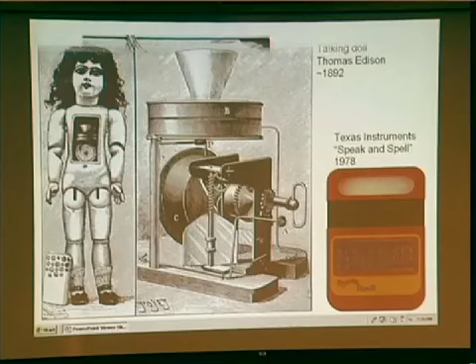Parenthetically, let me say that in the Ozma of Oz, which was a sequel to The Wizard of Oz, Dorothy comes across the mechanical man. You wind him up and he can walk or talk. But rather like ex-President Ford, he can't do both at the same time.

Now, another example of what would be surprising in its day is articulated arms. Humans have articulated arms, and here's the first statue that actually had articulated arms. Of course, they only had 1 degree of freedom. And by comparison, the human arm, counting all the fingers and all the joints and so forth, has about 27 or 28 degrees of freedom. Still, 1 is a start.

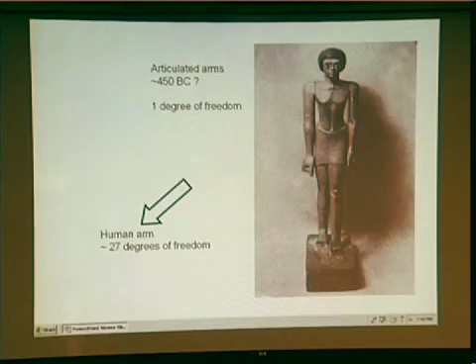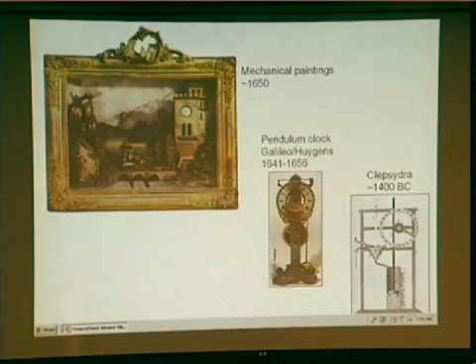Around the same time, mechanical paintings became very popular. Now, in some sense, I wouldn't consider this to be a robot because it doesn't perform any animate function. On the other hand, you have to imagine the balloon drifting back and forth, the windmill turning, the train moving, the boat moving, and of course, the clock moving. And a clock moving is, of course, a sequel to the first pendulum clocks, which were, the concept came from Galileo, but was perfected by Christian Huygens. And that, in turn, was the automated version of the clepsydra, which goes way back in history. I don't consider any of these to be robots.

And then for 200 years, this technology was lost until an inventor came along in Switzerland very recently by the name of Francois Junod, and he has built this machine.

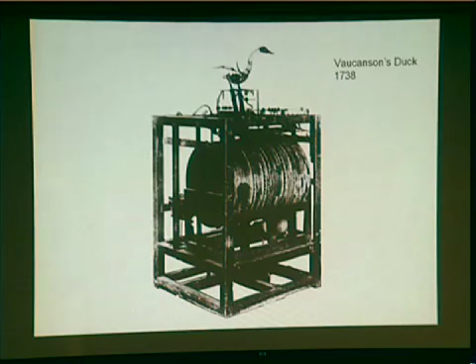The operator would realize the duck was hungry, so he'd take a dish of food and put it right in front of the duck. Almost immediately, the duck would start eating the food, and as it swallowed, you could see the peristaltic motion of the neck muscles. Then it would stop periodically, quack, look around, flap its wings. When it finished, it had eaten very quickly—you could see from the pained look on its face that it had eaten too fast. It had a stomachache, looking more and more uncomfortable, and suddenly with a little grunt, it relieves itself on the table. A chemical smell spreads out through the room. Wild applause for Vaucanson's duck.

Now, how did it work? Well, of course, there was a small chess master hiding inside it. Many people speculated on the construction.

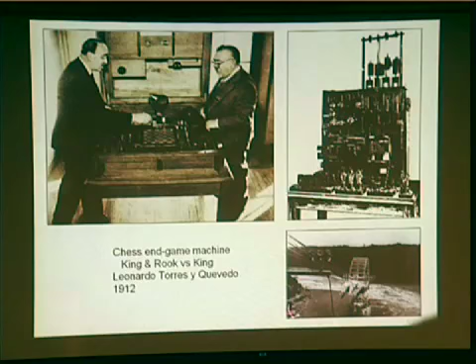Now, the first actual chess-playing robot was built in 1912. An electromechanical machine was built by Leonardo Torres y Quevedo, shown here being demonstrated to, I think that's either von Neumann or, what's the other guy's name, Norbert Wiener. I don't know which that is. All it could do was play a king and a rook against a king. But remember, no computer involved, purely mechanical system. By the way, Quevedo also was responsible for building a cable car that runs above Niagara Falls so tourists could go there.

Now, the next major topic of this talk is to get into the work of the artificial intelligence labs around the world. There are 4 subtopics: intelligence, mobility, visual recognition, and dexterity.

The people who coined the phrase artificial intelligence, or AI, were John McCarthy at MIT and later Stanford, and Marvin Minsky at MIT. They predicted that within 10 years, computer programming would get so good it would be world champion. Well, a pretty good chess player by the name of David Levy didn't believe this, so he offered to bet £1,000 that the machine wouldn't even be able to beat him in 10 years. And 10 years later, he won that match.

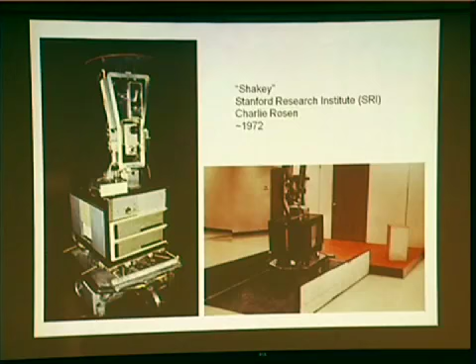At the same time, there was a project at SRI, headed by Charlie Rosen and Nils Nilsson, called Shakey the Robot, so-called because it would roll to a new location and then it would kind of shake back and forth until it damped out. Also battery-powered television camera, but here it's given a task in robot planning. The task is to knock the block on the floor, and it figures that in order to do that, it has to find the ramp, move the ramp into position, then roll up the ramp, and then knock the block on the floor. So what it's doing is planning, and that's surprisingly animate.

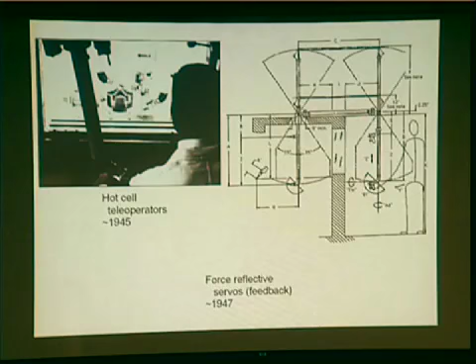One of the problems with this is that there was no force reflection, so he couldn't tell how hard he was grasping. So if you're holding a test tube, if you grasp too hard, you crush it, and if you don't grasp hard enough, you drop it. So within a few years, it was necessary to add force reflective servos.

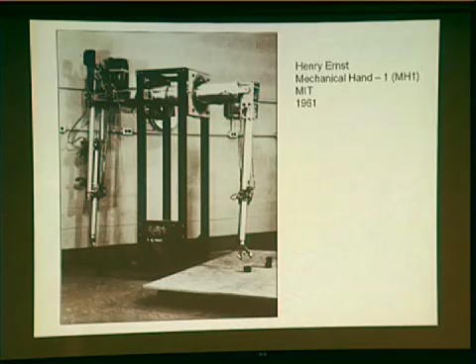Henry Ernst took one of these machines and replaced the operator with some motors attached to a computer in 1961 as a PhD thesis. He also added sensors in the robot hand and programmed it to grope around a table, feeling for blocks, and then either stacking them up or dropping them in a large box. He was, by the way, then hired by IBM with the stipulation that he would never for the rest of his life work on robots again.

13 years later, MIT had progressed to this level, the so-called copy demo, in which an operator has built a building out of blocks. The camera looks at it, figures out how to build it, and then it builds a copy of it. Or, if you wish, a mirror image copy of it, whichever you prefer.

Around the same time, Stanford was working in the area, and this is the so-called Stanford arm, built by Vic Scheinman in 1972. Let me mention that Vic Scheinman is here today. Where is he? He's hiding. So there he is, over there. At the end, when you start asking me questions, you can split up and ask him some questions.

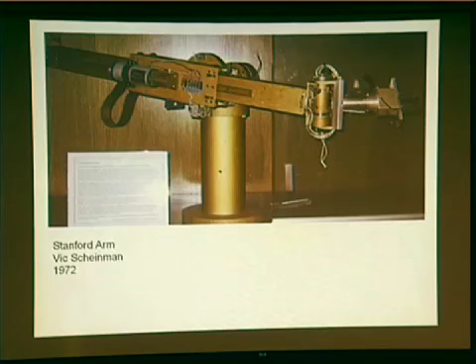After this arm was built and attached to a large computer, Lou Paul programmed it to solve the instant insanity puzzle. The puzzle is to stack these blocks up so that each column has all four different colors. The television camera can only see 2 or 3 faces at a time, so it takes about 5 minutes for the robot to turn blocks over in different orientations until the camera sees all the faces. Then it takes about 1 millisecond to solve the puzzle, and another 5 minutes to stack it up in the right answer, hopefully without accidentally dropping the blocks. So in doing this, I had to write a program that was very general, that could turn absolutely anything upside down, provided that it was a 1-inch cube.

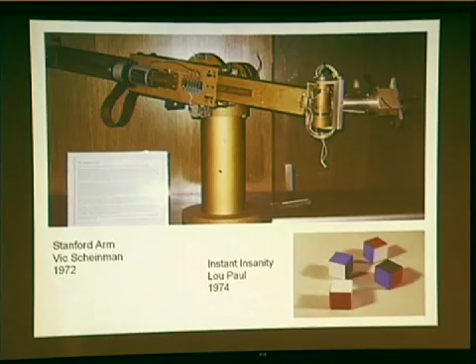Around the same time, Donald Michie at University of Edinburgh programmed the assembly of a toy truck out of its 7 component parts: 4 wheels, 2 axles, and a chassis, initially in an aimless heap on a black background. The robot consists of an XY table on the whole floor, and an arm that comes down, about this size, which can move up and down, turn, and grab things, all attached to a very large computer. The camera looks, figures out what's sticking out the side of the white pile of stuff, grabs it, and palletizes it. That takes a while. Then when everything is palletized, it does the assembly. If it can't find anything it recognizes on the periphery of the white blob, instead it smashes the blob, and things scatter.

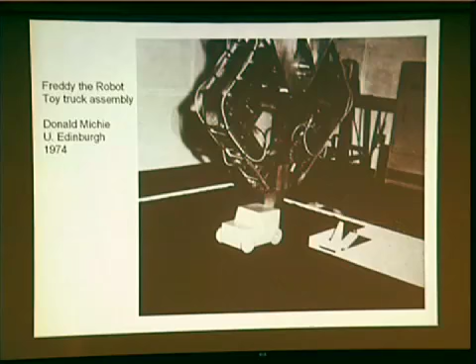Well, it was at this point that the British Science Research Council in England decided that maybe this was a foolish way to spend money, so they commissioned Sir James Lighthill to evaluate whether or not robotics research was useful. Sir James Lighthill, a famous mathematician, said that if you look at the way people are working on robots, they're all men doing the research, and all these robots operate in a child's world as seen by a man, and the stimulus is the urge to compensate for lack of the female capability of giving birth to children.

This is actually an early version of the report. The report then got edited before the final version came out. But you can imagine the Science Research Council, after this, stopped the funding for many, many years.

But it also got people thinking more in terms of useful robots.

And immediately at Stanford, they turned to the assembly of a water pump, which involved bringing the base into position, then getting 2 locating pins from their holder, put them here, pick up a gasket, put it on the locating pins, get the top of the pump here, then pick up the power screwdriver, get a screw, run in 4 screws, put down the power screwdriver, return the 2 pins to the locating holes, get the power screwdriver, and run in the last 2 screws. Total process about 5 minutes and about 50% reliability.

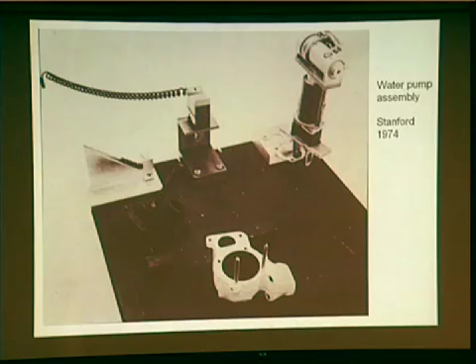But that's great progress. This is really attempting to do something that demonstrates something useful.

And around the same time, a project was started at IBM to build a robot that could do assemblies, perhaps something like a typewriter rail assembly, a very dexterous machine that we called Klutz. Around this time, it was programmed up with power tools and parts to assemble 25 pieces of a typewriter.

By the way, earlier, just to make sure the machine was working, I programmed up a demonstration that it could also build a toy, Mattel Build-A-Train, out of 16 parts.

However, with regard to the typewriter, let me mention that a typewriter in 1975 had about 1,000 parts. A printer today has about 40 parts, so it's about 25 times easier to assemble, and therefore whether it's assembled by a robot or a machine or in fact by a person is of much lower importance. This is the general topic of whether or not one can redesign something so that you don't need robots to do it in the usual sense. I'll come back to that topic later on.

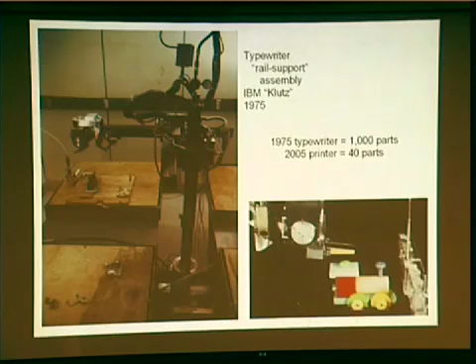This gripper on our robot had a sensor between the fingers, an infrared beam, so you could program it to detect when something was between the fingers. So you could program it to just sit there all day long waiting for a fly to fly between the fingers and grab the fly, which would make it the world's 2nd most expensive fly catcher.

And of course, the question is, if that's the 2nd most expensive flycatcher, what's the world's 1st most expensive flycatcher? I don't know if anybody here knows the answer, but I'll tell you. The answer is Barry Bonds.

And I'll digress again since I'm on the subject of baseball. There's a theme here, fantasy versus reality, and you see a lot of press reports. A lot of it you really should be very skeptical of.

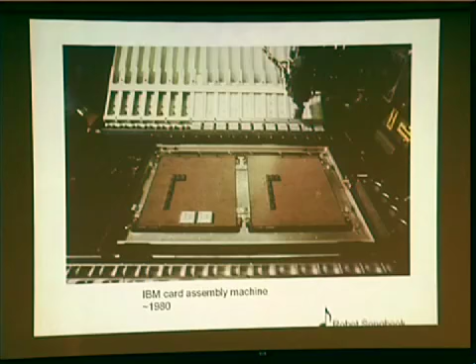You don't put dips in, you don't wrap wire, so those who wrap it cannot retire. It's to the tune of Old Man River.

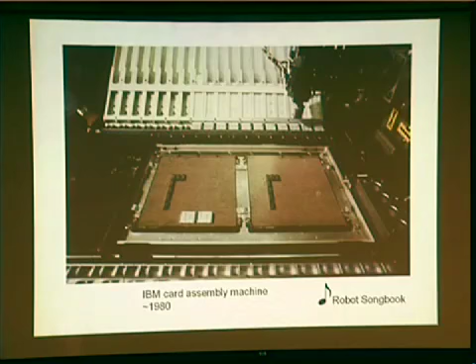It turns out that programming a robot with sensors to pick up a raw egg is a lot easier than you might think, and we had done it about 8 years earlier. I remember very well, we were so pleased when the robot picked up the raw egg without breaking it. Then we said, okay, now command it to crush the egg. And it strained, and it strained, and it strained, and the fingers broke.

Now, some of you maybe were unaware that IBM ever sold robots. But then I would guess that most of you are unaware that many years earlier, IBM actually sold a precision cheese slicer. So robots is much more plausible.

Now, in terms of assembling complex things, you may think that an assembly like this of a steering mechanism could only be done by a human or a robot. But in fact, that's not true. The technology is well established for building very complicated room-filling machines called transfer machines. They cost multiple millions of dollars. This is the view of such a machine. Incredibly complicated.

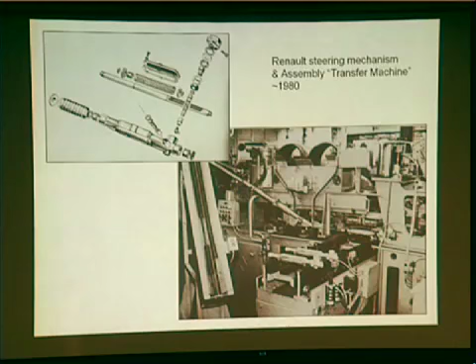Incredibly complicated. And one of the features of such a machine is that if you make a very minor change in the object that you're assembling, the machine can't cope with it at all, so it has no adaptability. So I wouldn't consider a machine like that to be a robot, because it's really, in my opinion, not surprising and not animate.

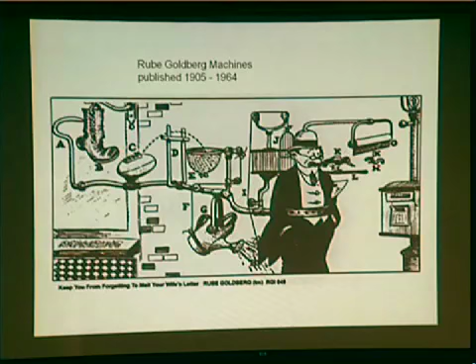In fact, when I look at a machine like that, it reminds me of the cartoonist Rube Goldberg, and I thought I'd include one of his cartoons here. This is a machine that automatically reminds you to mail a letter to your wife. The way it works is that when you pass the shoe repair place, there's a shoe hanging down, so you've got the strap on your waist, and it hooks that, and the boot then kicks the ball over the goalposts into the net, lifting the watering can, watering down the tails of the coat, which on a pulley system pulls up the door, the bird comes out, goes for the worm, and pulls down the message that says mail your wife's letter.

But here's a Rube Goldberg invention that's a heck of a lot earlier. An automatic doorman, I submit to you, in its day, if it had ever been built, would have been considered surprisingly animate. The concept is that you build a fire at A, and through some heat transfer mechanism, compartment B heats up. The water is then pushed over the siphon into bucket D, and through an arrangement of pulleys and capstans, the door opens. And later, when the fire goes out, the doors close.

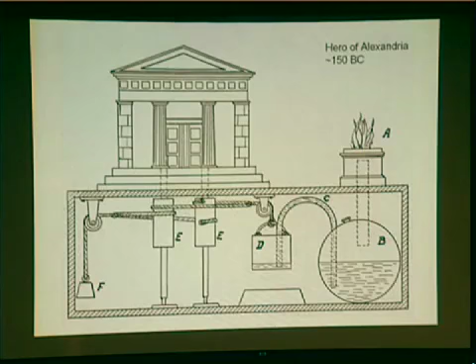Automatic doorman. One of the most famous machines that came out of the Industrial Revolution is the Jacquard loom, which semi-automated the process of weaving. It has, driving it, a system of punch cards, a whole sequence of punch cards, and the holes determine which threads get lifted and which threads get lowered at each step as the shuttle moves back and forth.

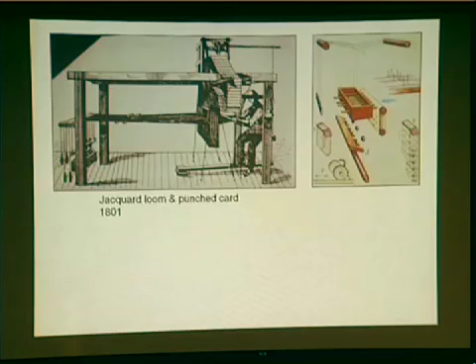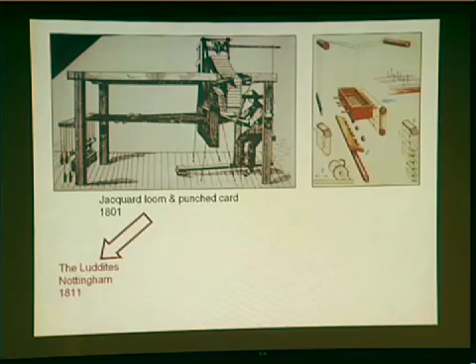Now, this gave rise to a whole lot of other things. The first thing it gave rise to was that a lot of people were afraid it was going to take away their jobs. And therefore, an organization established itself known as the Luddites, and they went around breaking into factories and smashing machinery of this type. It got to be a sufficient problem that in 1811 the British government sent out troops to Nottingham. They rounded up 50 Luddites, executed them, and the problem went away.

The second thing is that Charles Babbage was the inventor who invented the difference engine, a mechanical machine, but then he followed it up with a programmable computer that he called the analytical engine. He never actually got it built, but he put together a lot of plans for it, and it was to be programmed using a sequence of punched cards. The first programmer for it was a mathematician by the name of Ada Lovelace.

This ties together with Mary Shelley from earlier, because Mary Shelley was married to the poet Shelley, and they were good friends with Lord Byron and his wife. In fact, Ada Lovelace is the daughter of Lord Byron and his wife.

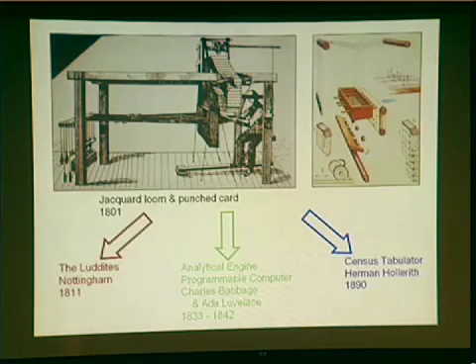The third thing worth mentioning is that this idea of using punch cards was the way Herman Hollerith applied it to doing the census tabulator in 1890, and eventually his company grew into IBM.

Predating the AI lab work on useful robots was the work of George Devol and Joe Engelberger, who saw the need for building industrial robots that could function in car factories, lifting the heavy welding gun that weighed about 70 pounds. In those days, it was hard to convince American companies to use it, so they went to Japan and had no difficulty convincing people.

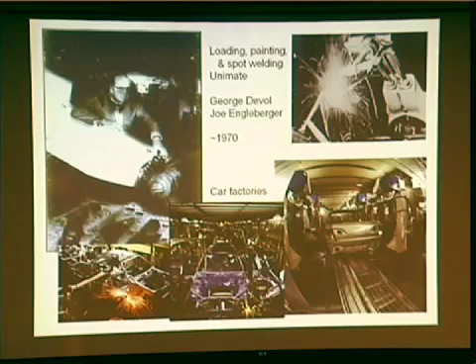Now automatic robots of this nature are used in car factories all around the world. If you've never been to the NUMMI factory in Fremont, look it up on their website. The only requirement is you have to be at least 10 years old to go there, and you'll see lots of robots.

One of the things we did in the robot project at IBM was the feasibility study for a medical robot called RoboDoc, which was to grind out the inside of the femur for an orthopedic hip implant operation, and it could grind it out very accurately.

But there are many other instances of robots in medicine, and I'll show a few. Here's a scrub nurse that has speech recognition capability. So you say scissors, you reach out, and it slaps scissors in the surgeon's hand, and presumably keeps track of it so he doesn't accidentally sew up the scissors inside the belly of the patient.

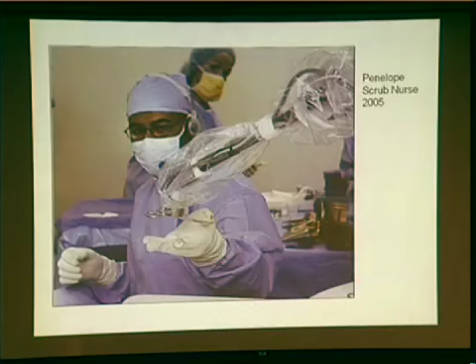But in some sense this is obsolete, in that it's invasive surgery, and more important as time goes by is minimally invasive surgery or even non-invasive surgery. So that brings me to this topic.

Minimally invasive surgery, the concept arose as early as 1800, but it wasn't until the laparoscope and flexible endoscope were invented that it became feasible.

Then the more recent version of that is to use robotics to hold the different tools. The operator then sits at a computer display, and furthermore he has some image-guided capabilities so he can ask it to move to a particular location just by putting the cursor there.

Now, once you get to a situation where the surgeon can be on the other side of the room, it's a small step to say instead, why can't the surgeon be 1,000 miles away? Obviously this is of great interest to surgeons and the military, because surgeons do not particularly want to be on the battlefront.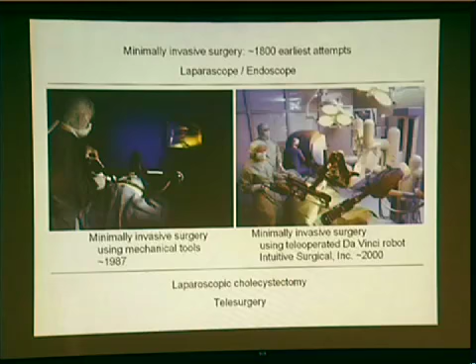Let me mention in passing here that laparoscopic removal of the gallbladder has become the prevalent way of doing it. Almost 1 million operations a year are done these days using this technology.

In the future, you can expect minimally invasive surgery in a magnetic field, where of course the scalpel and other tools have to be made out of plastic because the magnetic field is so strong. I prepared this chart a long time ago, but just last week there was a report of some prototype of this in existence. So you can expect that.

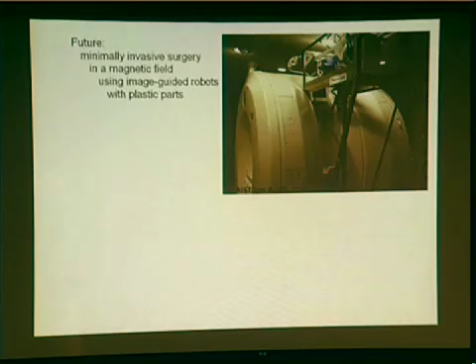You can also expect minimally invasive surgery using intestinal crawlers like this one here. You can see it can clamp on, has a biopsy needle for taking a sample, has a light and television camera, and it just crawls through your intestines doing whatever it has to do. So you can expect that in the future to achieve reality.

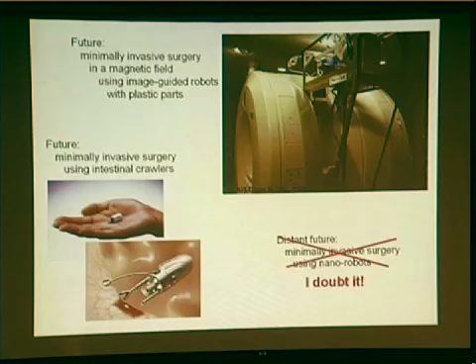And then the final thing, in the distant future, you can expect minimally invasive surgery using nanorobots. But I want to be really, really clear here when I say you can expect this - you can expect it, I don't expect it. I think it's baloney, and so I doubt it.

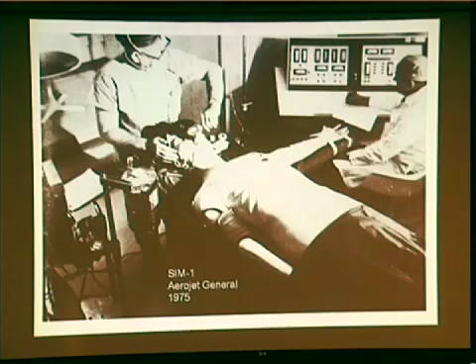Now here's a wonderful medical robot, Sim1, built by Aerojet General in 1975, teaching medical students how to perform tracheotomy operations. The robot has pulse and respiration. If you do the operation wrong, it dies, and presumably then automatically sues for malpractice.

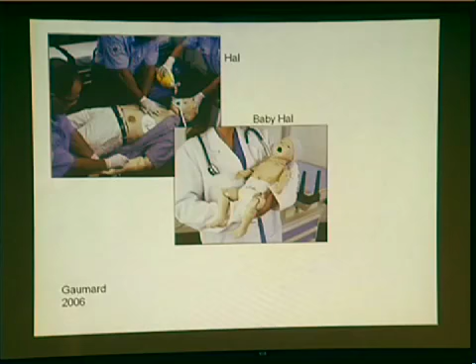The more modern version is built by Gaumard. Here's Hal, here's baby Hal, and here's Mama Hal. She's just had a cesarean section. You can see the wound here, and there's baby Hal in the background.

But I think the people working on this training technology are missing the real big commercial application, which is that when it comes to weekend golfers, we are all disabled. Wouldn't you like to strap yourself into something that would teach you the perfect golf swing, and everybody would immediately be as good as Tiger Woods?

Here are some service robots from 1980: a mail cart that could follow a chemical line, and hospital delivery robots in the early days delivering meals and linen, but now also a teledoctor, so the doctor doesn't have to leave the comfort of his office as he interviews a patient. I'm sure you'd all love that.

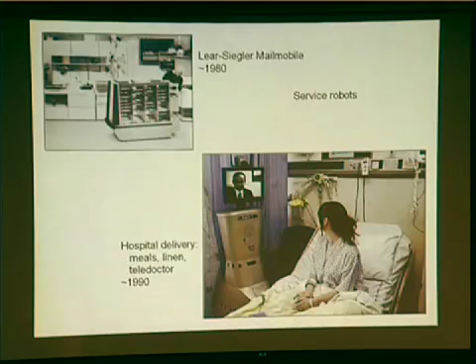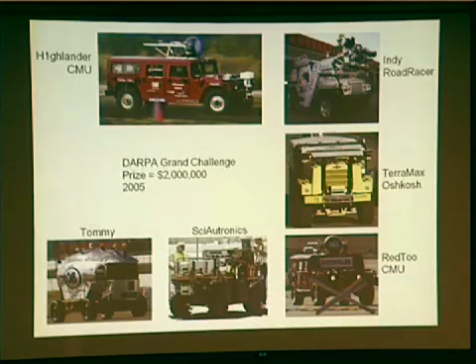Now I come to the topic of military robots. In 2004, DARPA started the Grand Challenge: could a robot car drive all the way through the desert, 160 miles or so? None of the robots finished. But the next year there were lots of entries. Here are some of them. The winner was Stanley from Stanford, led by Sebastian Thrun.

Now, the military has been interested in other kinds of vehicles. In particular, they were interested in a walking truck that could be a truck, or maybe it could replace the tank. The problem with a tank is when it comes to a boulder-strewn field, the tank has to navigate around the rocks while the enemy is shooting at it. Wouldn't it be nice if the tank could leap over the rocks while shooting at the enemy?

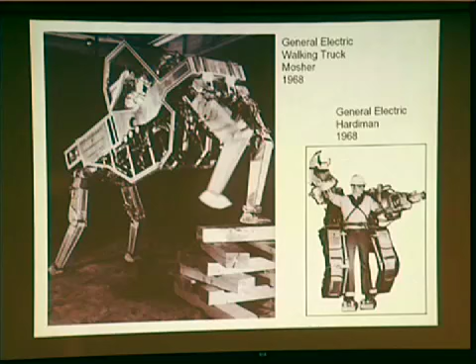Here's another example of sort of military robots: BattleBots, which were popular on television for about 5 years. Here are some of the heavyweight champions during that period.

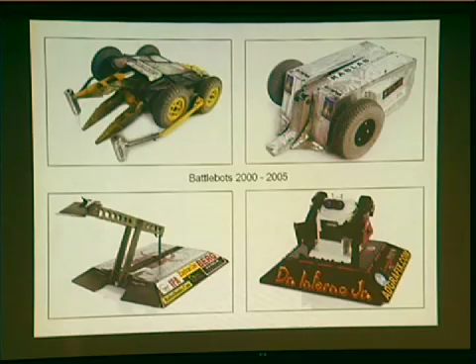Then along comes Isaac Asimov a number of years ago with the idea that robots should basically be benevolent and not hurt people. Rule one: they may not injure people. Rule two: they must obey orders. Rule three: they must protect their own existence. Out of that came the series of stories called I, Robot, which deals with the ethical conflicts of these different laws. The very last story in I, Robot is about a giant machine called Megavac, which could be considered a robot physicist, because it's been programmed to try to figure out a way of reversing the second law of thermodynamics. Megavac computes away for billions of years.

The universe is running down. All sentient beings have long since disappeared. Finally, Megavac comes up with the answer, but there's nobody to tell the answer to, so Megavac decides it'll try the answer. Megavac says, 'Let there be light.' And the universe starts all over again. So it's not just a robot physicist, it's a robot god.

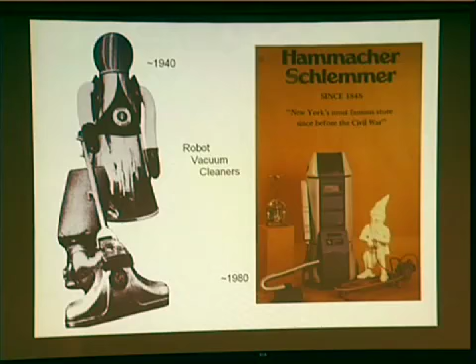Well, that inspired a bunch of imitators, but all the imitators were joystick-driven systems, not autonomous systems. This is a hobbyist version from 1940, and here's a commercial version from 1980, so you could sit on your couch and drive the vacuum cleaner around. But in recent years, you see actual autonomous robot vacuum cleaners, the well-known iRobot Roomba, and a few competitors, which I don't know if they're still around.

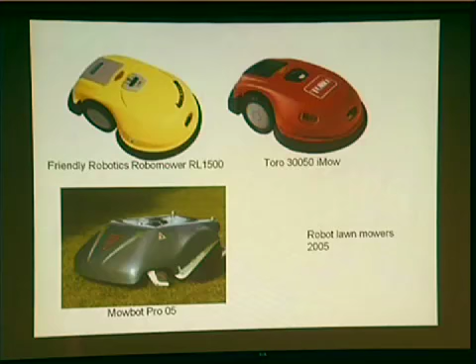Around the same time, one also sees robot lawnmowers. Here are a few of them, autonomous again, where you put some sort of a wire around the periphery of your lawn so it doesn't go running off down the block while you're sleeping. And it's a good idea not to let your baby play in the yard.

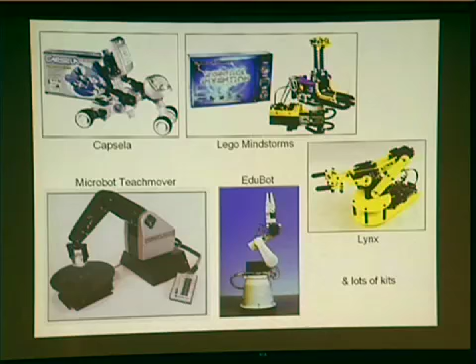Then there are educational robots. There are lots of different ones here. I'm sure many people have seen some of them, and there are also lots of kits not shown here.

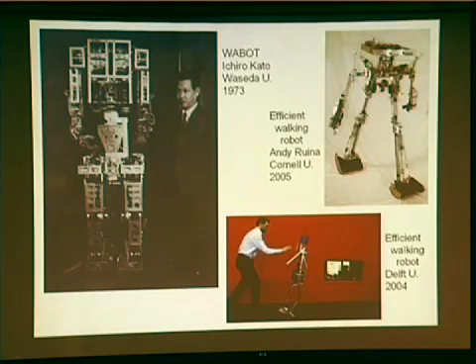Now, actually, walking robots date all the way back to 1973. Ichiro Kato at Waseda University built this machine on the left. Humans, when they walk, use very little energy to walk. These robots use a great deal of energy to walk, and by comparison, recently, a couple of researchers have managed to build highly efficient walking robots where the free leg swings freely in an arc without using energy.

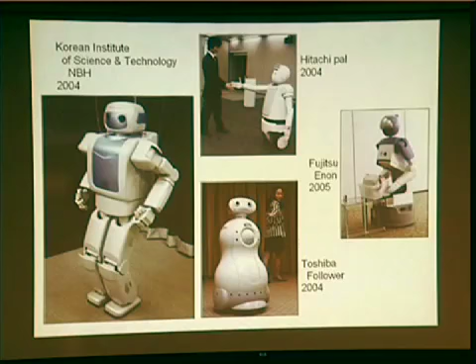You don't generally see this kind of accuracy in the reports. Usually you see only, oh yes, it put the package on the table, amazing. That's the difference between fantasy and reality.

But this brings me to the whole topic of female robots. Beautiful female robots.

This concept first arose in Tales of Hoffmann, a story called The Sandman from 1815. It was the inspiration for the ballet Coppelia by Delibes in 1870. In it, the toy maker has gotten drunk, and meanwhile some teenagers have broken into his toy shop. The girl is caught there, so she dresses up as a doll, and he's so drunk he doesn't realize—he thinks she's really his doll come to life.

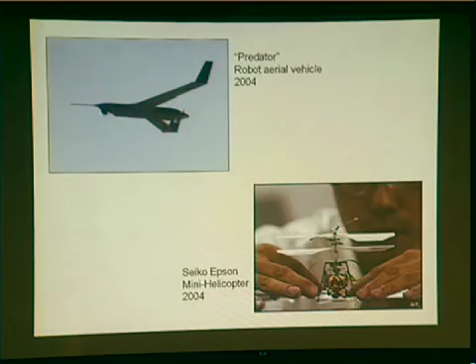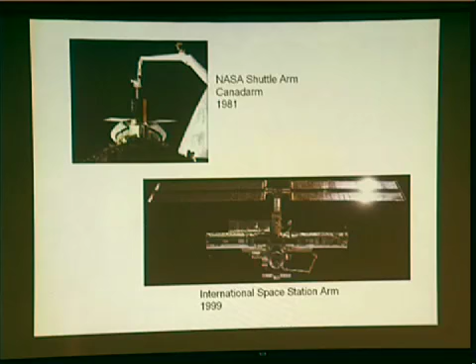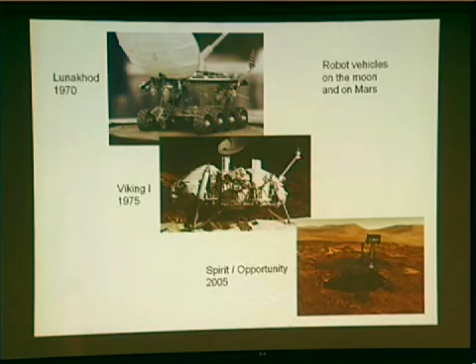Moving out into space, you see a robot arm here on the shuttle, and you see a robot arm here on the space station. And then, of course, there's the Robonaut from NASA, and some vehicles, or in one case stationary but with an arm, some robots that have been sent to the moon or to Mars.

As a last example of a hazardous environment, well, next to the last example, is crawling into a volcano with a spider-like robot. Final two hazardous environments: one is putting out fires, and the other one is cleaning toilets.

Here I will come back to the topic I mentioned earlier about the typewriter being redesigned so that a printer has a factor of 25 fewer parts. That's the case here. The toilet gets redesigned. You don't design a robot that knows how to carry a pail in one arm and a scrubbing brush in the other arm to clean toilets. Instead, you redesign the whole system so that the toilet is self-cleaning.

I'm coming to the end of the talk. I only have 4 more charts, 3 with conclusions. First, the definition again: a robot is anything that's surprisingly animate, but what's surprising changes over time. So in some sense, we already have household robots, except we're not surprised by them anymore.

Second, I'll spend a little bit of time on this. Don't expect intelligent androids in your lifetime. And some of you are pretty young in this audience, and I mean you. Motion dexterity is pretty difficult, but that's not the hard problem.

Vision recognition is much harder than motion dexterity. The ASIMO robot has a vision system in its eyes, so in some sense it sees, but it doesn't understand anything it sees. But natural language understanding is much harder.